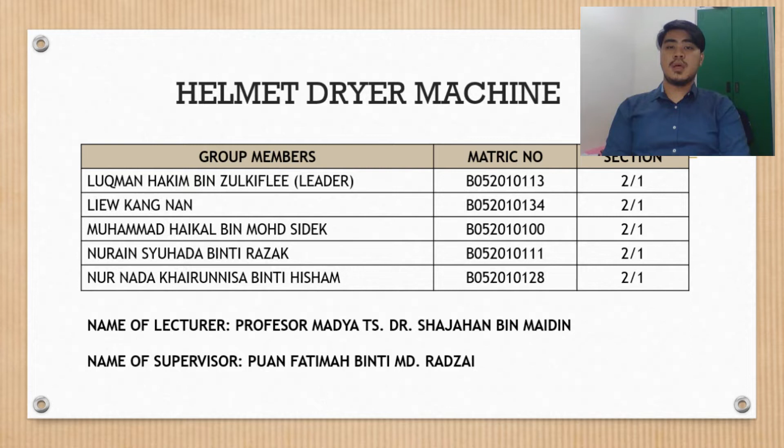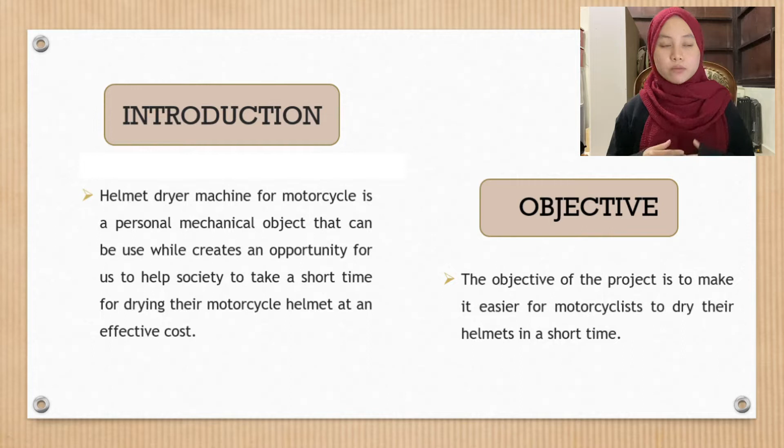The helmet dryer project for motorcycles is a mechanical object that creates an opportunity to help society dry their motorcycle helmet in a short time at an effective cost. The objective of this project is to make it easier for motorcyclists to dry their helmet in a short time.

Currently, it is reported that people always dry their helmet under the sun or under the light. With this erratic weather, the rate of time for the helmet to dry can be affected and will be slow. Also, using a damp or wet helmet will be smelly and uncomfortable to wear.

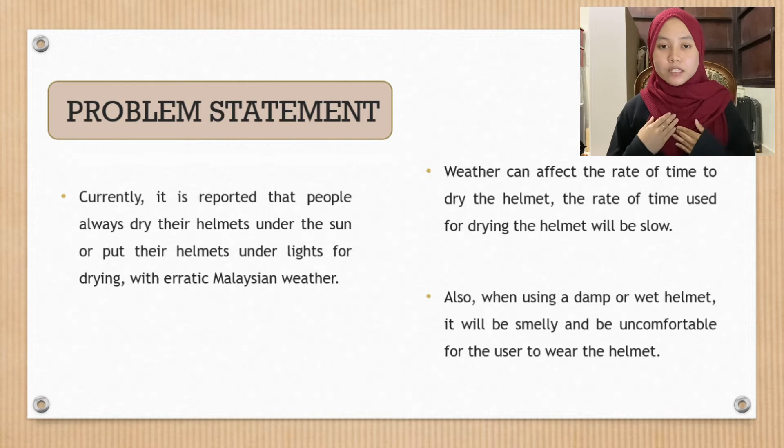We go through a literature review. The introduction is important to achieve a successful system because it helps identify problems that occur in existing systems, and helps identify the best approach to achieve the project goal based on the study.

Our design: the entire design of this product is in a cube shape, as it is not too complex, easy to shape, and suitable for users of all ages.

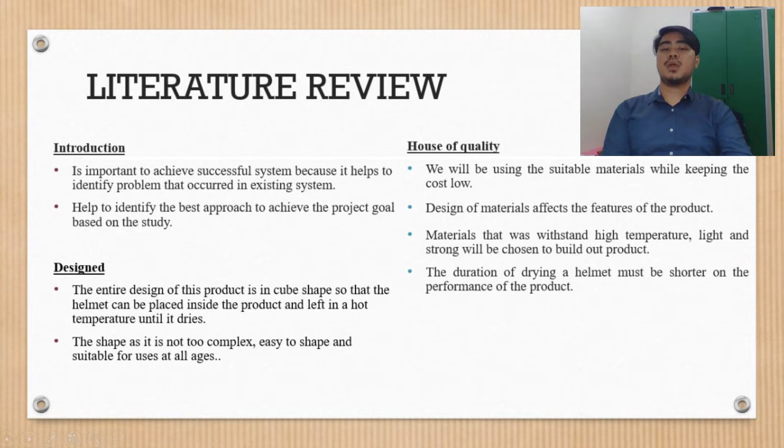For house of quality, we will be using suitable material while keeping the cost low. The choice of material affects the features of the product. Material that can withstand high temperature and light, and is strong, will be chosen to build our product.

For the questionnaires, there are a total of 10 questions divided into Section A and Section B. Section A consists of 4 questions and Section B has 6 questions mainly focused on the product specification and characteristics. The value of a well-designed questionnaire, whether it tests what it's supposed to test, is absolutely important for a researcher to be aware of.

And lastly, design for manufacture and assembly. These earlier methods are risky, costly, and time-consuming. Our parameters for the drying helmet system eliminate the drawbacks of methods used earlier. The on switch plus set timer operated helmet drying machine has a design which helps the user use it effectively, efficiently, and eco-friendly. That's all from me.

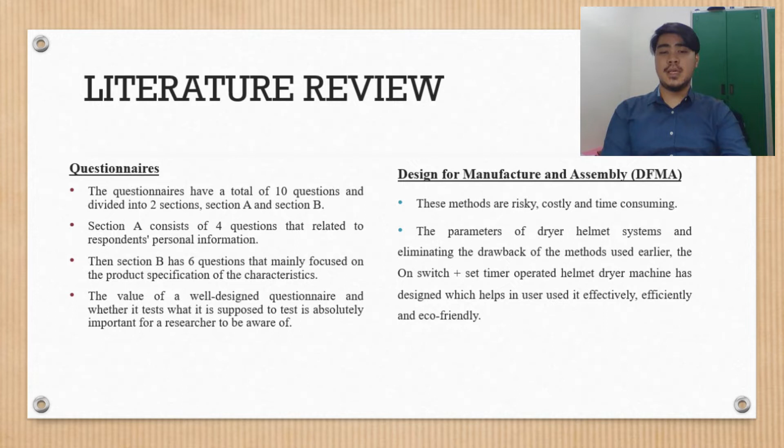Thank you. The questionnaire and survey section talks about the interview we conducted to get valuable information. Next, the focus group and research section talks about the HOQ, also known as the House of Quality.

Then for the Gantt chart - why did our group use a Gantt chart? We use a Gantt chart to well manage our project and make it more efficient.

Besides that, a flowchart helps our group identify all the possible processes involved in making our project.

The material description talks about the properties of our selected material, which is aluminum alloy. Furthermore, the experimental design talks about the constraints and characteristics of our project.

Research approach and research method talks about the House of Quality for our project, which also refers to the interview we conducted earlier.

The morphological chart divides all the possible small chunks of components that we need for our project.

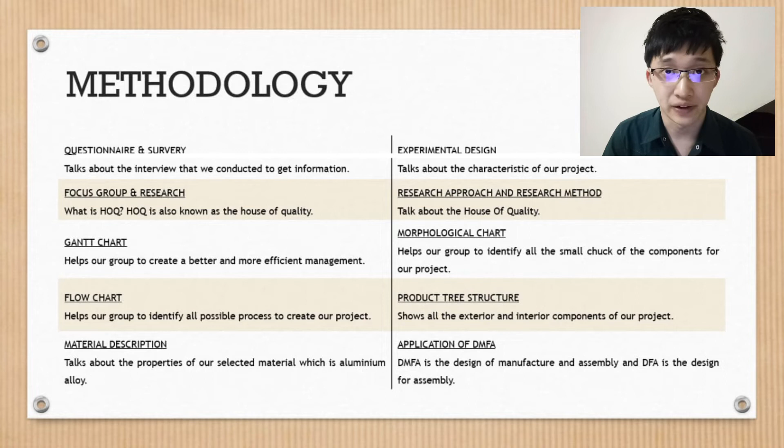From this questionnaire, this is the feedback we received from all the respondents who filled in the Google form for the helmet drying machine. This helmet drying machine is suitable for various ages because it is easy and safe to use.

After that, the QFD is used to justify the customer needs and show how the requirements relate to the methods of quality product. The customer requirements are easy to use, design of product, quality product, performance, affordable cost, safety, and lightweight.

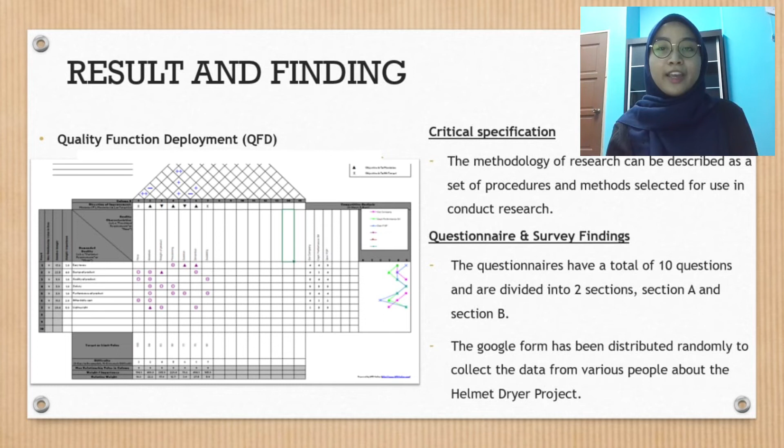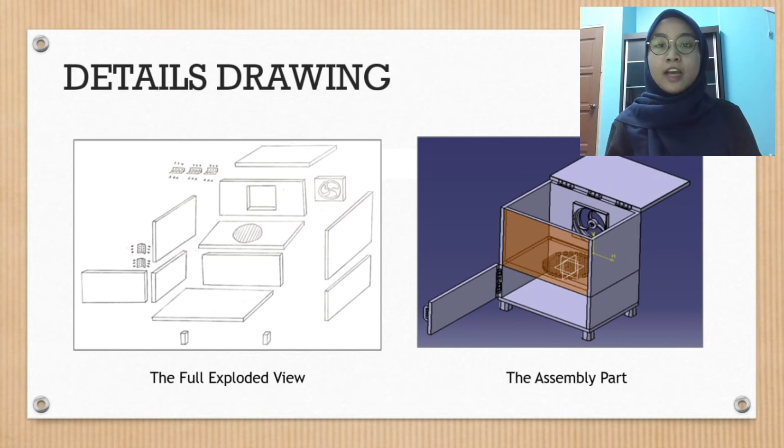DFMA is a combination of design for manufacture (DFM) and design for assembly (DFA). Next is material selection, which has 4 steps.

The first step is translation. Translation is where we list our function, attributes, product constraints, objectives that can be achieved, and the last is free variables.

The second step is screening. The material properties were based on data retrieved from CES software.

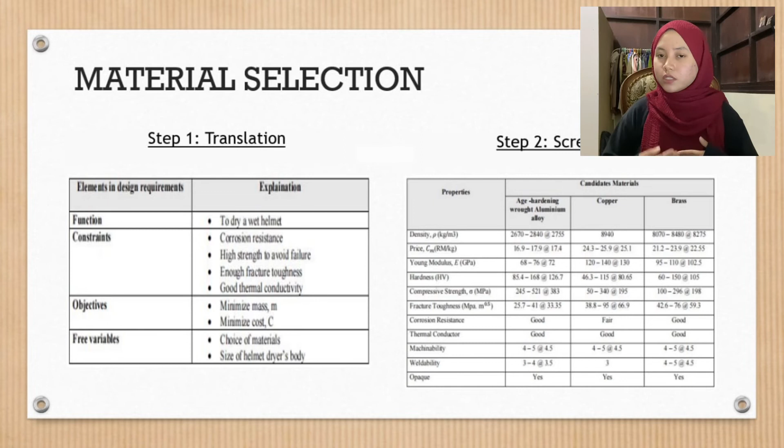The third step is ranking. Ranking is performed to select the best material for the body of the helmet drying machine, using a scoring method from 1 to 10. The material with the highest score will be selected.

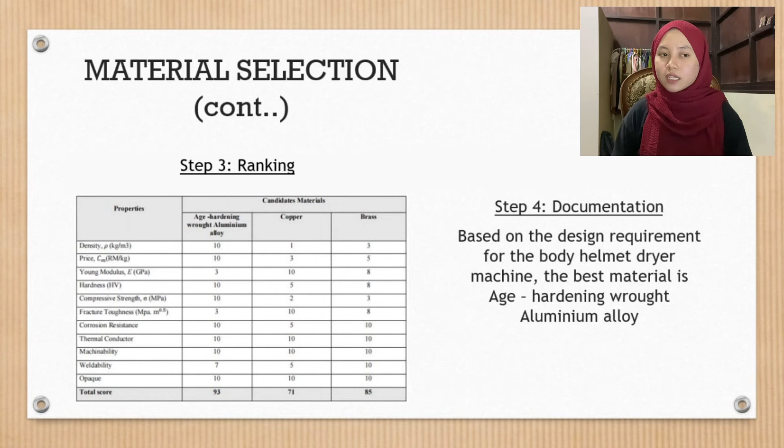The last step is documentation. Based on the design for the body of the helmet drying machine, the best material among others is age-hardening wrought aluminum alloy. Next is manufacturing process.

We use MIG welding because it is the most versatile of arc welding processes, allowing for ferrous and non-ferrous metals of variety, thickness, and welding position.

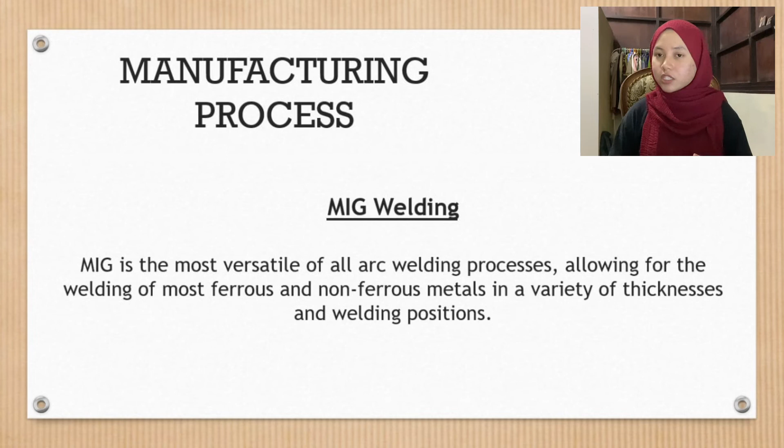Next is cost estimation for the helmet drying machine. We estimate the total bill of material for the helmet drying machine to be 501 ringgit and 32 cents.

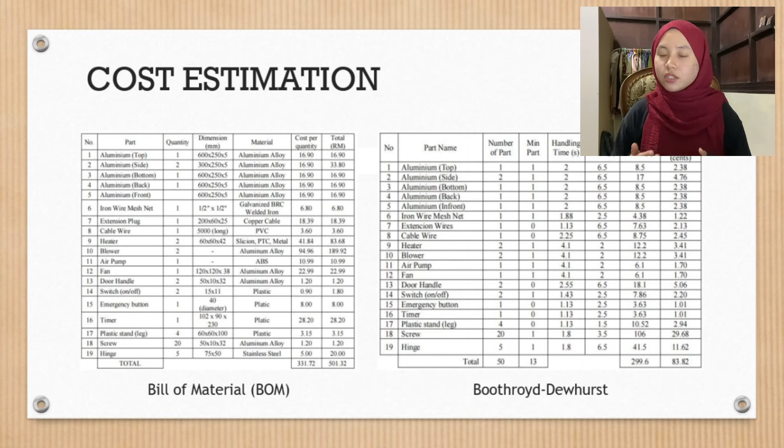Next, we use Boothroyd Dewhurst to estimate operation cost. The total operation cost we estimate is 83 ringgit and 82 cents. That's all for me. Thank you.

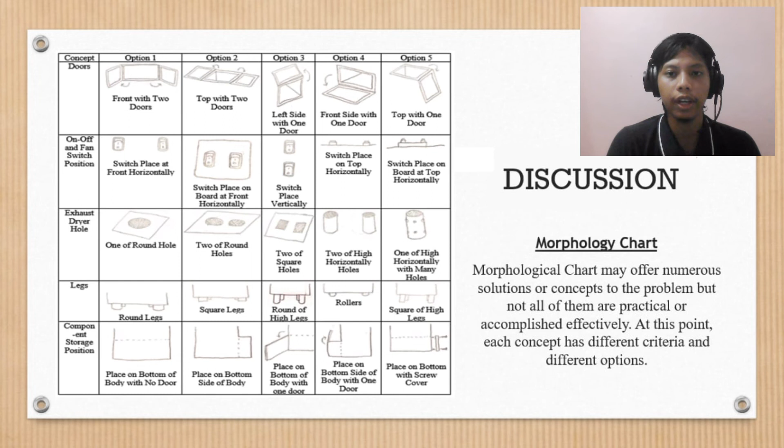The first thing is we need to produce 5 types of concepts about the helmet drying machine using a morphology chart. We need to choose 5 criteria and 5 options based on this table. In the next slide, we have 5 concepts of design, shown as 1, 2, 3, 4, and 5.

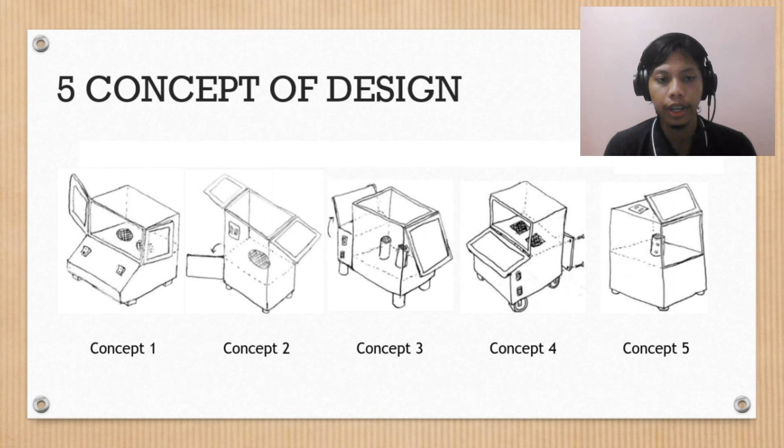Next, we need to choose the best concept using a concept screening method. We analyzed each of the concepts and finally ranked each one. The result is that we eliminated the base concept, concept 3, and concept 5. We combined concept 1 with concept 4, and continued analyzing with concept 2 using another method.

After that, we moved to the concept scoring method. We gave a score to both concepts, and finally chose concept 2 as our final concept as it got the highest score among the others.

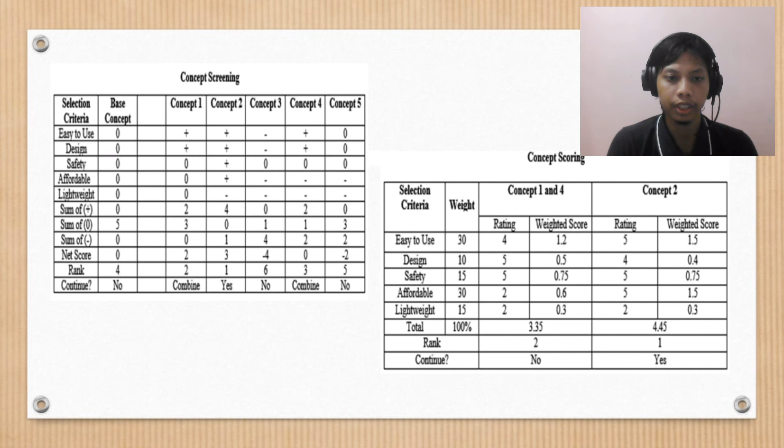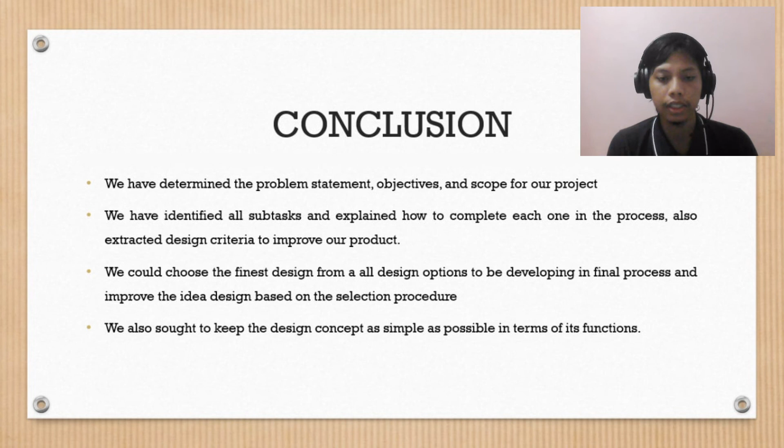So right now, the conclusion is we have determined the problem statement, objective, and scope for our project. We could choose the finest design from all design options to be developed in the final process and improve the ideal design based on the selection procedure. That's all from me. Thank you.